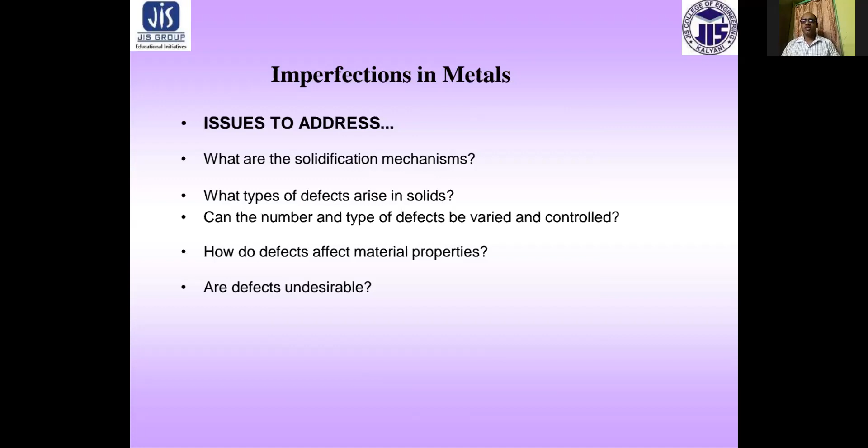So first of all, let's start with the solidification of pure metal. Solidification occurs by the nucleation and growth of crystal in the metal. Whenever the material or metal is extracted from its ore, it is in liquid form, and slowly it comes to room temperature.

Then the first step in solidification is the formation of nuclei. The nuclei can be regarded as a small cluster of atoms having the right crystalline arrangement.

When the melt is cooled below its melting point, the nuclei begin to form in many parts of the melt at the same time. This rate of nuclei formation depends on the degree of undercooling or supercooling, and also on the presence of impurities which considerably facilitate nucleation.

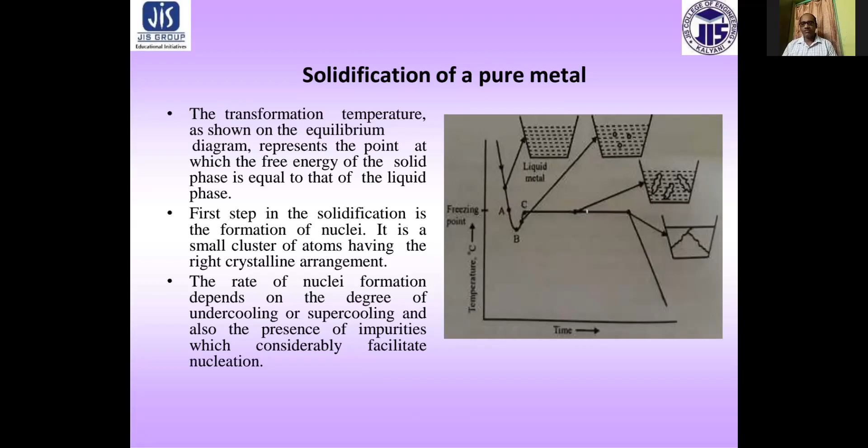At temperature below the melting point, a nuclei has to be a certain minimum size called critical size, so that it will grow. The critical size is the greatest near the melting point, but the probability of forming such a large nucleus is less.

Particles smaller than the critical size will be dissolved by the vigorous bombardment of neighboring atoms and cannot grow gradually. These are called embryos.

When the temperature is lowered, the vibration of atoms gradually decreases, increasing the chance of survival of small clusters of atoms, and therefore the critical size of nucleus decreases with decreasing temperature or increasing degree of undercooling. Hence, at lower temperature, nuclei become progressively smaller in size, but the number greatly increases.

Growth of nuclei occurs by diffusion process, which is also a function of temperature, and hence the rate of nucleation and the rate of growth are functions of temperature. It is also clear that some degree of undercooling is necessary to start the solidification, that is nucleation.

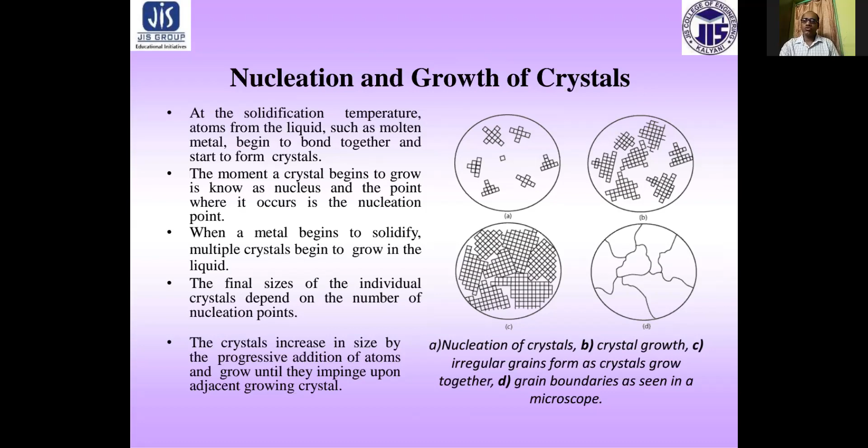Next, that is dendrites. In metals, the crystals that form from the liquid during freezing generally follow a pattern consisting of a main branch with many appendages. A crystal with this morphology slightly resembles a pine tree and is called a dendrite, which means branching.

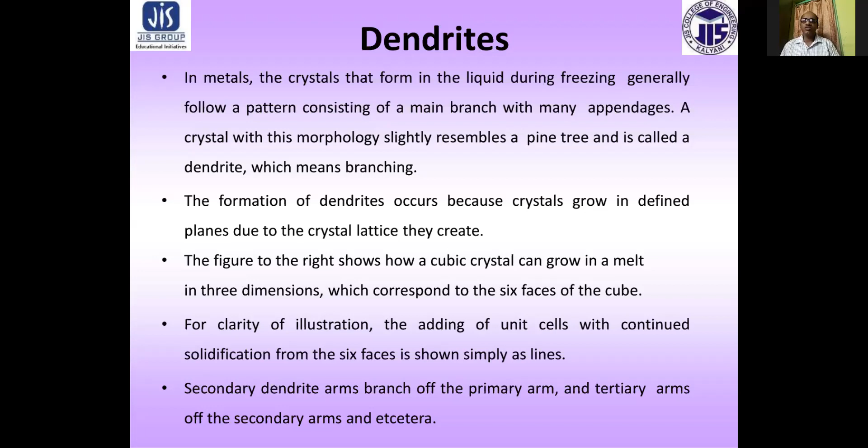The formation of dendrites occurs because crystals grow in a definite plane due to the crystal lattice they create. This figure shows the dendrite of a cubical crystal.

The mechanism of dendritic growth is as follows. If the metal has a cubic lattice, the nucleus has a number of equivalent crystallographic directions along which crystal growth may occur.

A considerable amount of latent heat is evolved in the direction of crystal growth, causing the temperature of the adjacent liquid to rise. This temperature may exceed the freezing temperature of the metal, so that further growth of the crystal in this direction will be stopped.

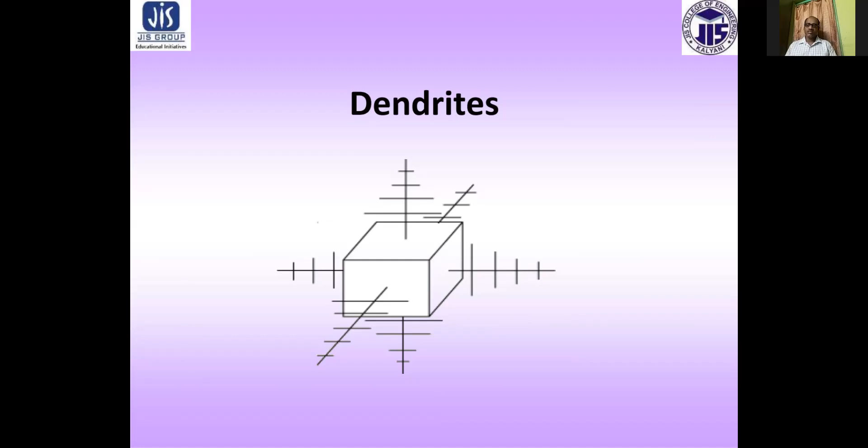Next is shrinkage. Material contracts or shrinks during solidification and cooling. Shrinkage is the result of contraction of liquid as it cools prior to solidification, contraction during phase change from liquid to solid, and contraction of the solid as it continues to cool to ambient temperature.

Shrinkage can sometimes cause cracking to occur in a component as it solidifies. Since the coolest area of a volume of liquid is where it contacts a mold or die, solidification usually begins first at these surfaces.

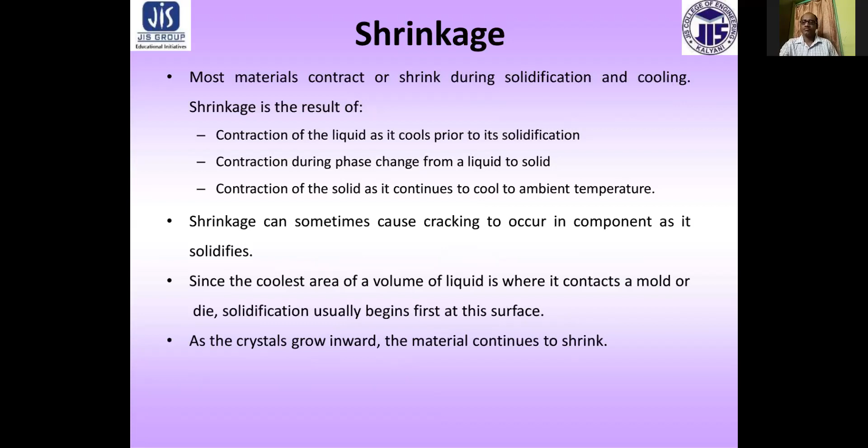As the crystal grows inwards, the material continues to shrink. If the solid surface is too rigid and will not deform to accommodate the internal shrinkage, the stresses can become high enough to exceed the tensile strength of the material and cause a crack to form.

Shrinkage cavitation sometimes occurs because as material solidifies inwards, shrinkage occurs to such an extent that there are not enough atoms present to fill the available space, and a void is left.

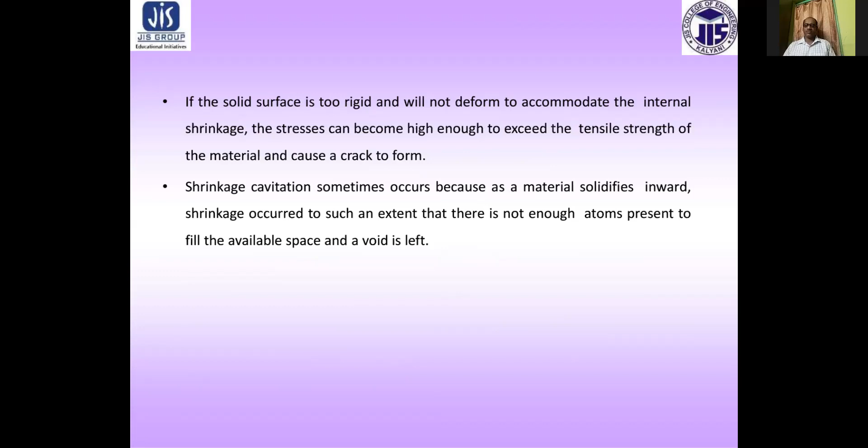Next, the thing we will discuss is imperfections of solids. As we just discussed, when the material is solidified, there is always a tendency for voids to be present in the solidified material.

So this gives the imperfections, or these are the imperfections in solids. In this chapter, we need to know that there is no such thing as a perfect crystal. The important questions raised are: what are these imperfections, and why are they so important?

It is very common to have imperfections in solids, or in other crystalline material, or even in amorphous material, and many important properties of materials are due to the presence of imperfections.

In a broad sense, imperfections may be defined as the defects in the crystals that are present when it is solidified from liquid state to solid state. We have discussed that during shrinkage there is always some voids and some extra space present in the solidified material when it is cooled to room temperature.

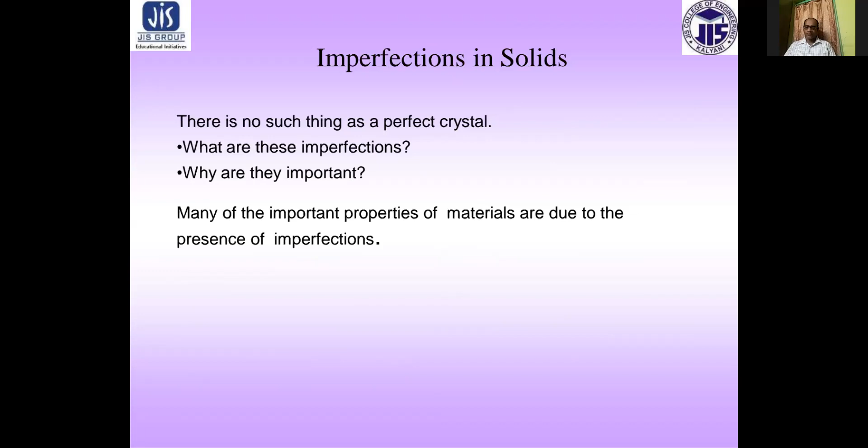None of these are completely perfect crystals; they often have structural defects which result in different physical and mechanical properties. Metal imperfection can be divided into geometric and physical categories, and these imperfections are divided mainly into three types.

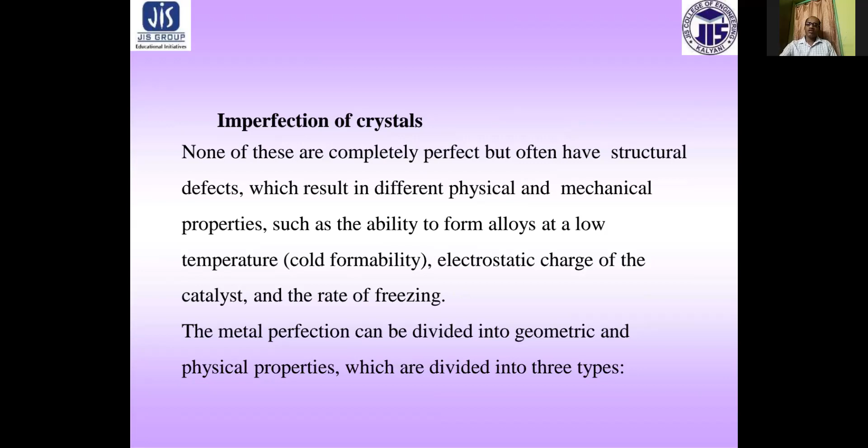First of all, point defects, or zero-dimensional defects. Under this, vacancy of atoms may be present, interstitial atoms, and substitutional atoms. So when interstices are there, there will be a substitution of atoms. These broadly come under point defects, also known as zero-dimensional defects.

Then there are line defects, or one-dimensional defects, which include edge dislocations and screw dislocations. And there is another kind of defect called surface defects, or two-dimensional defects, or planar defects. Under these come grain boundary defects, twin boundary defects, stacking fault defects, and low angle boundary defects.

In addition to these, there may be defects in the electronic configuration of individual atoms. They have a strong influence on electrical and optical properties of materials. However, in the strict sense, they are not crystal or lattice defects, and hence they are not considered here.

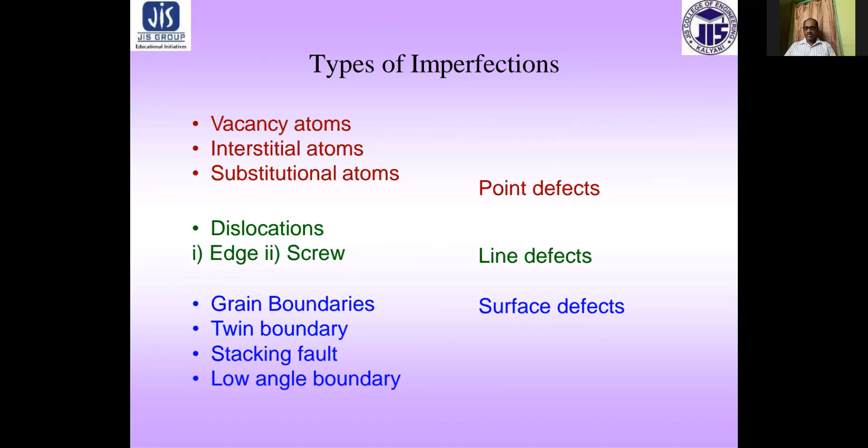In addition to these, we know that atoms are not stationary at their designated lattice positions but are vibrating about their mean position, and the frequency of vibration depends on temperature. These vibrations of atoms play a fundamental role in affecting certain properties, such as specific heat and electrical resistance of the material.

So now come to the type of defects or imperfections. Zero-dimensional point defects, one-dimensional linear defects, two-dimensional defects or planar defects, which include surface and inner defects. In addition, three-dimensional macroscopic features of bulk defects formed due to various reasons, that is holes, cracks, and contaminants.

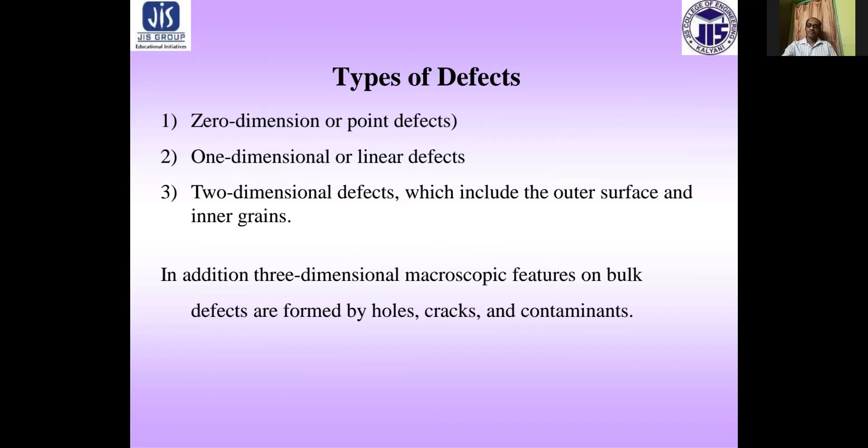So first of all, we will discuss zero-dimension or point defects. These are the most common imperfection caused by loss of some atoms in the structure, which often occurs when the metals dissolve by systemic disturbance during the growth and redistribution of atoms in the structure.

These point defects arise because all the atoms in the solid possess a vibrational energy at all temperatures above absolute zero. That is, at absolute zero temperature, the atom possesses a vibrational energy, whatever small it may be.

So when the temperature of the material increases during various working processes or by heating, these point defects increase. That means atoms which have sufficient energy to break the bond holding them in their equilibrium position may break the bond and move from one place to another from their equilibrium position. Now, once the atoms are free from their lattice site, they give rise to the point defects.

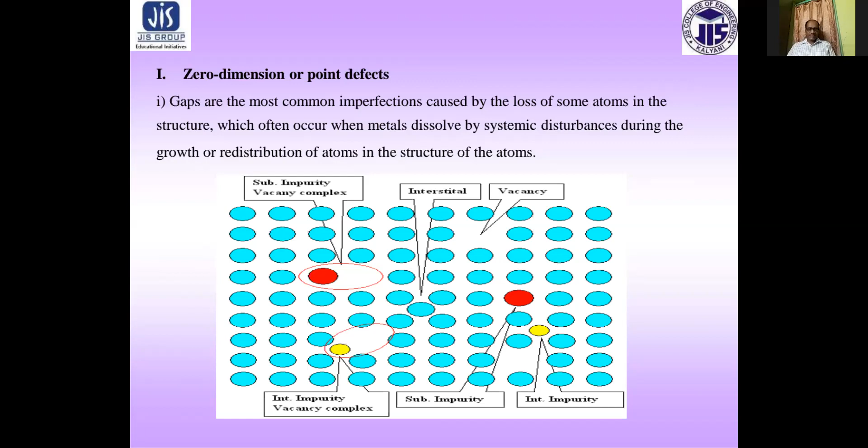In addition to these defects, divacancy and trivacancy may exist in the crystal. Next, there are another two types of point defects present in case of ionic solids, called Frenkel defects and Schottky defects. Frenkel and Schottky defects are formed in ionic solids.

An atom may leave its regular site and may occupy nearby interstitial sites of the matrix, giving rise to two defects simultaneously: one is vacancy and the other is self-interstitial. These two defects together are called Frenkel defects. This can occur only for cations because of their smaller size as compared to the size of anions.

When a cation vacancy is associated with an anion vacancy, the defect is called Schottky defect. Schottky defects are more common in ionic solids because the lattice has to maintain electrical neutrality.

Now, what are the effects of these defects, and some of the properties that need to be discussed. First of all, they increase the hardness and tensile strength due to distortion of the lattice. They increase the electrical resistivity. Vacancies increase the kinetics of diffusion and phase transformation.

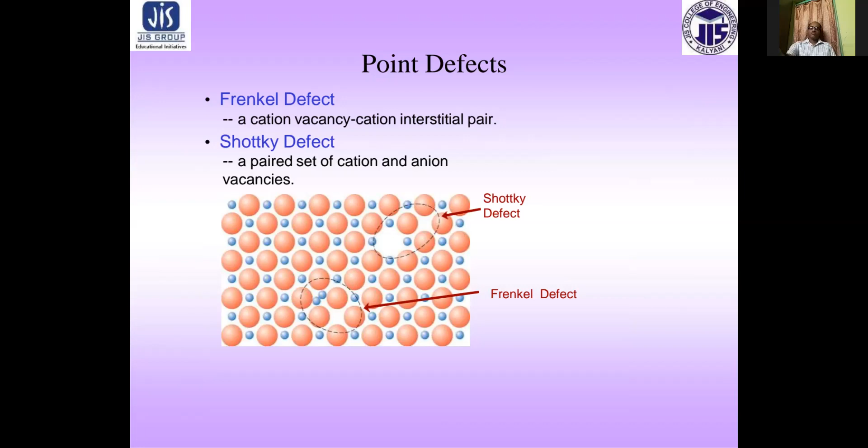Now next, we will discuss one-dimensional or linear defects. These linear defects are also known as dislocations. It is defined as a part of a line of atoms missing from its regular site, and this missing row of atoms is called a dislocation. The distortion is centered along a line, and hence the line defect is called a dislocation.

Movement of dislocation is necessary for plastic deformation. This dislocation is the boundary between the slipped region and unslipped region, and lies in the slip plane. The structure and behavior of dislocation affects many of the properties of engineering materials.

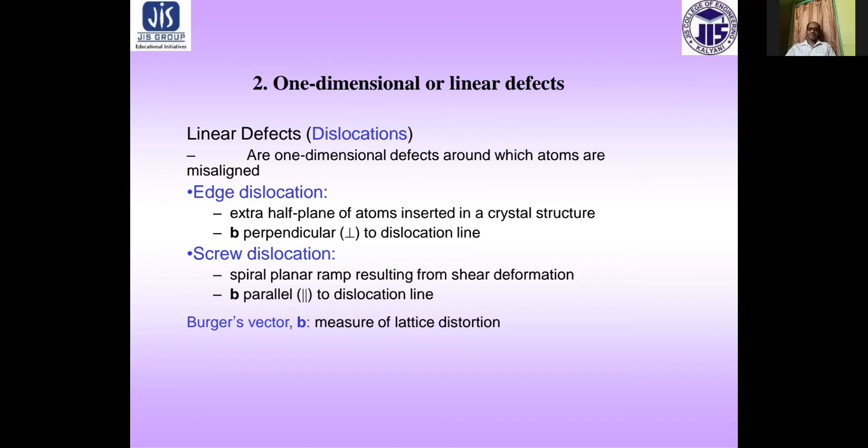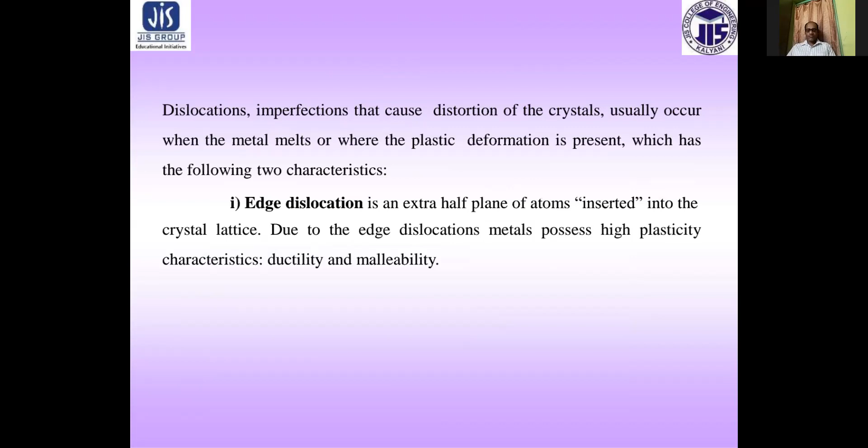This type of line defect is also called a positive dislocation, and it's denoted by the symbol of inverted T.

This extra plane is present in the upper half of the crystal, and if this extra half plane is below the crystal, this is known as a negative dislocation and is denoted by the symbol T.

The lattice above and below this dislocation line is in a distorted state. For a positive dislocation, the lattice above the line is in compression, whereas below the line it is in tension, and reverse in the case of a negative dislocation.

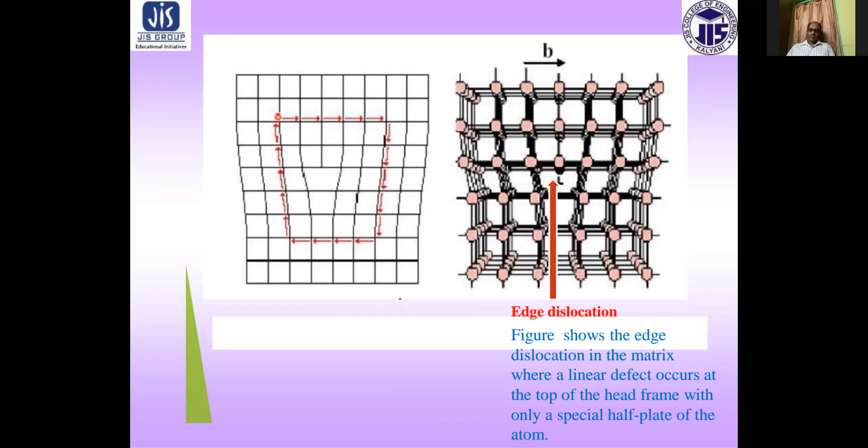For the edge dislocation, the Burgers vector is normally perpendicular to the dislocation line. Next, we come to the other type of dislocation or line defect, called screw dislocation.

This screw dislocation can be imagined as being produced by cutting the crystal part way through with a knife, and then shearing one part of the crystal with respect to the other, parallel to the cut, as shown in this figure.

The name screw dislocation is given because it transforms successive atomic planes into the surface of a helix around the dislocation line. The Burgers vector is parallel to the dislocation line. Such a dislocation has neither tensile nor compressive stress, but has shear stress.

In general, dislocations are more complicated. However, they can be resolved to obtain their edge and screw components. Dislocations come into the material during solidification or by mechanical processing of metal.